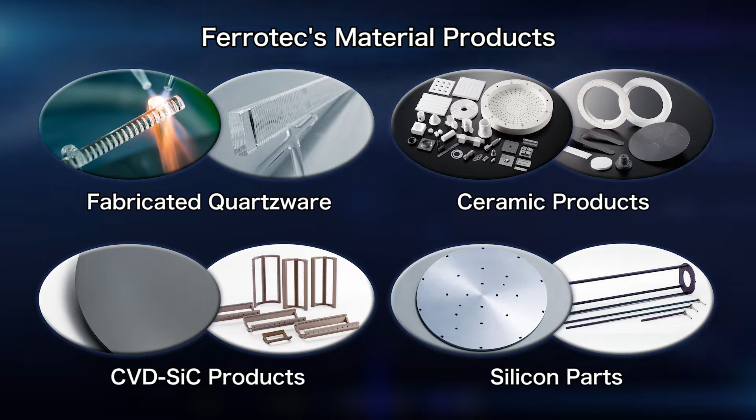Ferrotec is a global company that manufactures and sells high-tech components focusing on the semiconductor market. In the semiconductor equipment-related business segment, we provide material products used in jigs and supplies for semiconductor manufacturing equipment. We also provide vacuum feed-throughs, parts cleaning services, and more.

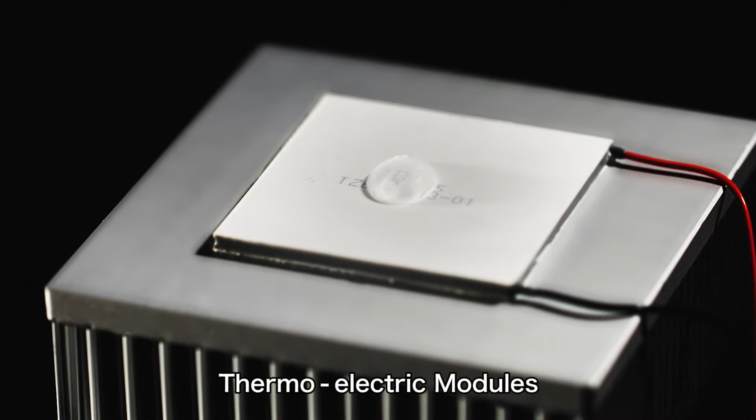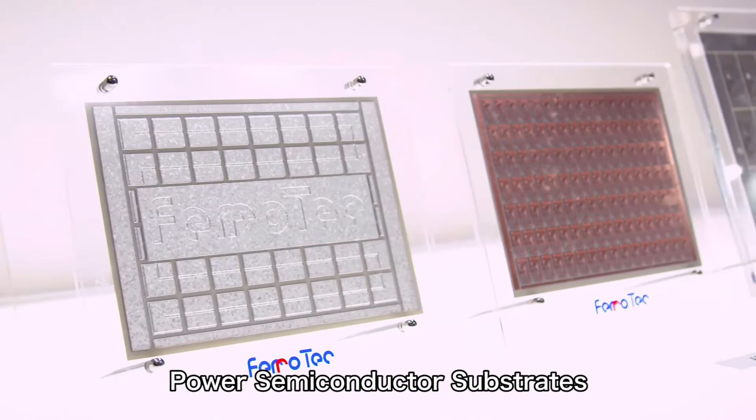Another of our core business segments is the electronic device business segment, where we provide temperature control devices, both thermoelectric modules and power semiconductor substrates, which are seeing tremendous market growth.

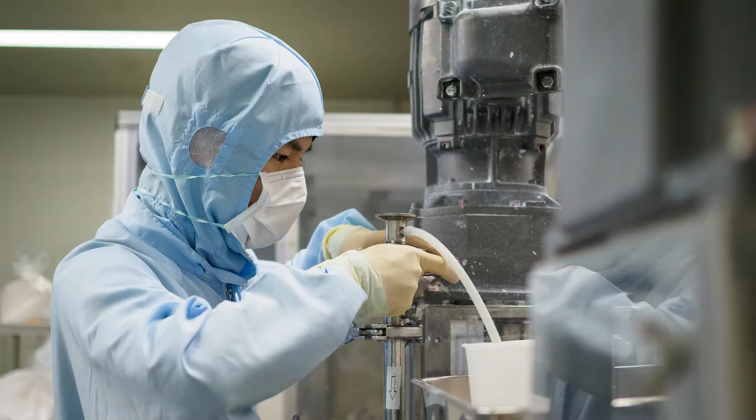Our corporate mission is satisfaction for our customers, earth-friendly and environmentally conscious, and dreams and vitality for our society. We want to earn the trust and satisfaction of our customers, to help solve the world's environmental problems, and to contribute to society through manufacturing. We strive to achieve harmony with society while maintaining a global perspective, supplying products and services that improve the lives of all people.

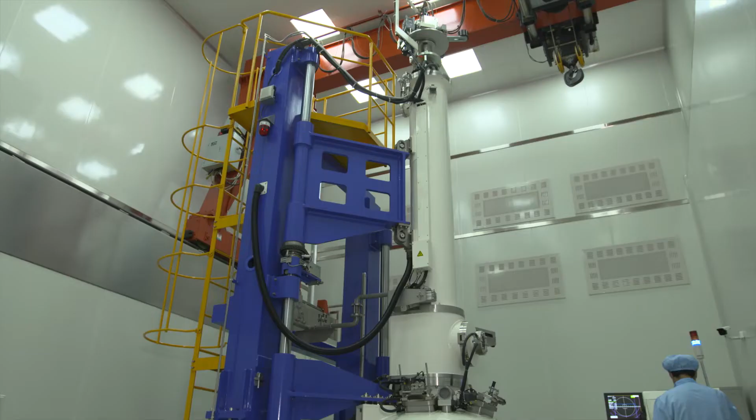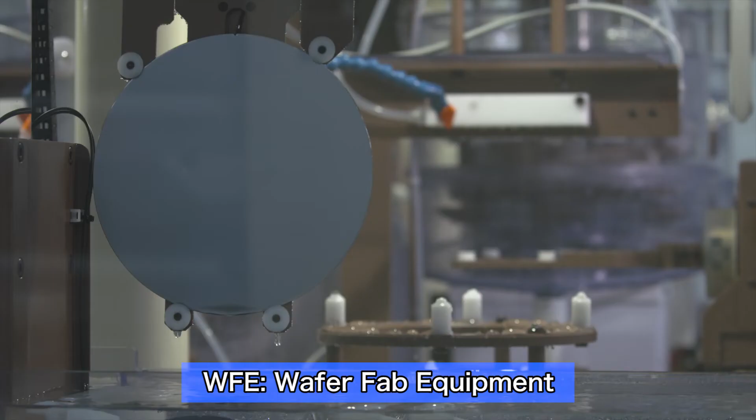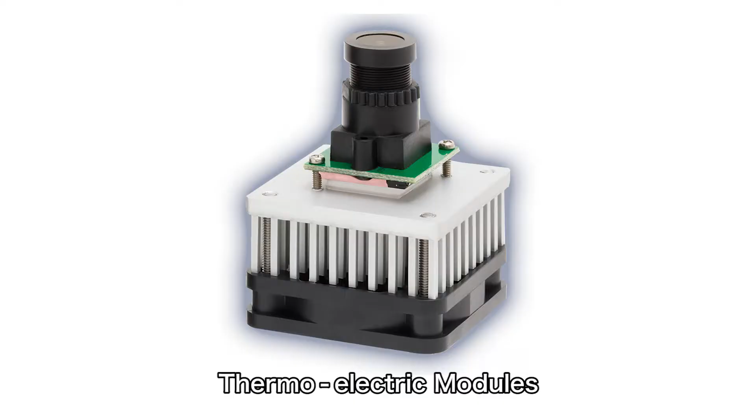Markets closely linked to our business include the WFE market for front-end semiconductor manufacturing equipment and the global semiconductor market. We expect to see sustained medium and long-term growth in all of these markets. In the future, there is also high potential for growth in the markets for electric vehicles and automated vehicles, which also use thermoelectric modules and power semiconductor substrates from our electronic device business segment.

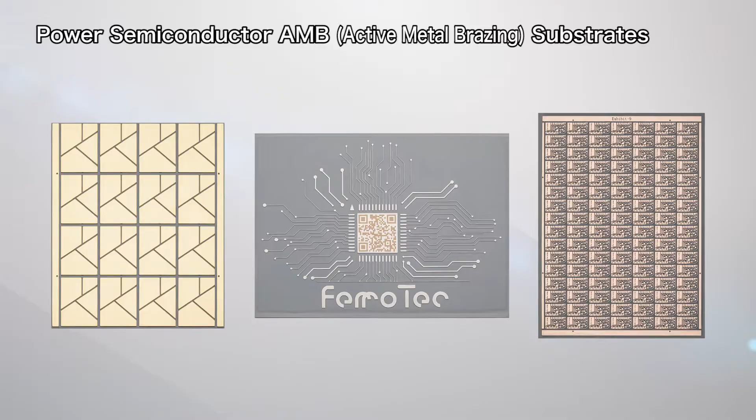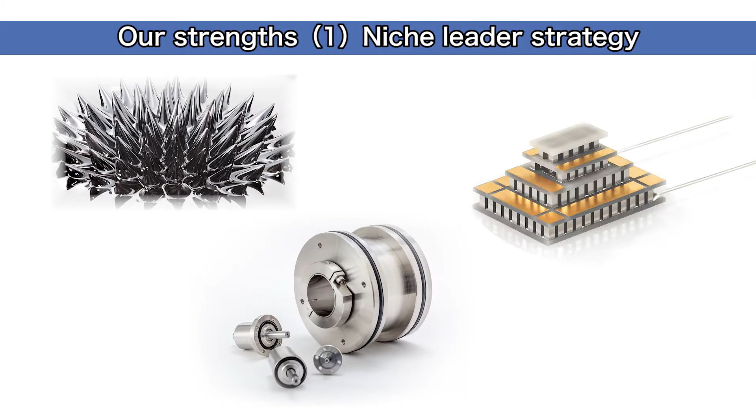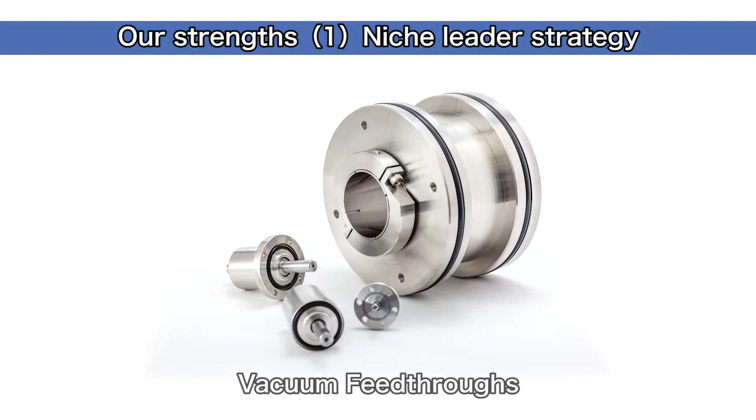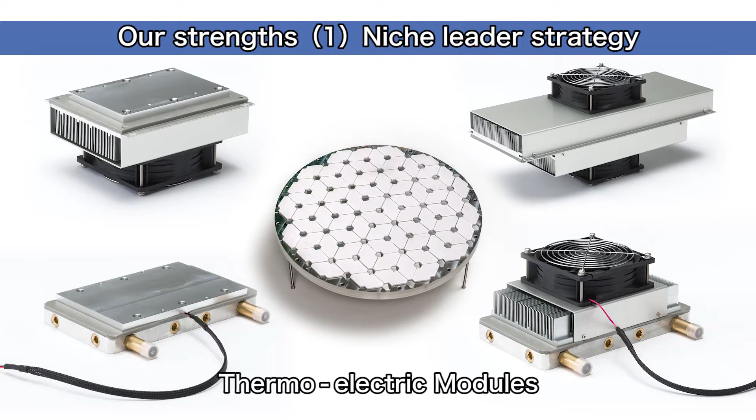For many years, Ferrotec has steadily performed as a company thanks to the core technologies and products that support our niche leader strategy. Our core technology, ferrofluid, a magnetic fluid developed for the NASA space program by our former US parent company, is applied in one of our core products, vacuum feed-throughs. Another core technology, the thermoelectric module, is used as temperature control devices in a wide range of industries. We continue to maintain the top market share for all of these products, and they are the foundation of our business operations.

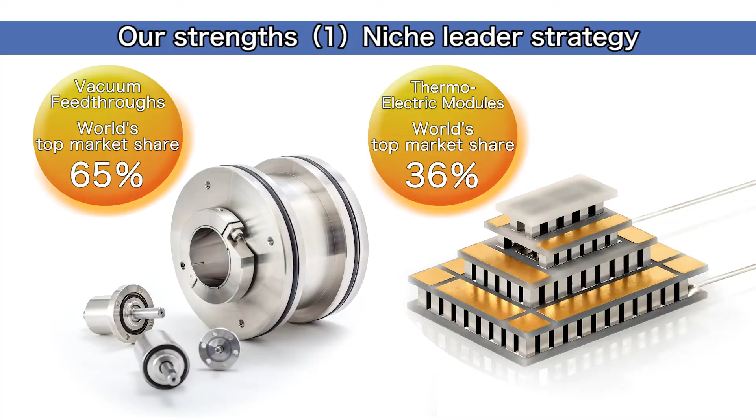Since Ferrotec was established in 1980 as the Japanese subsidiary of a US-based company, we have grown by actively carrying out M&As. In 1992, we were at the forefront of expansion into China, which further contributed to our growth. Through effective M&As related to our core product line of material products used in jigs and supplies for semiconductor manufacturing equipment, we have advanced in our development of materials and production technologies, primarily in Japan, and significantly grown our business, especially in China.

We are a global company whose main clients consist of device manufacturers and semiconductor equipment manufacturers, with some of the most advanced technologies in the world. As part of our global strategy, we have numerous production sites in China, whose market is expected to see the greatest amount of future growth. This is one of our company's strengths. We will also be enhancing our research and development and expanding our production sites in Japan, the US, Europe, and Southeast Asia in order to meet the rising need for semiconductor markets around the world.

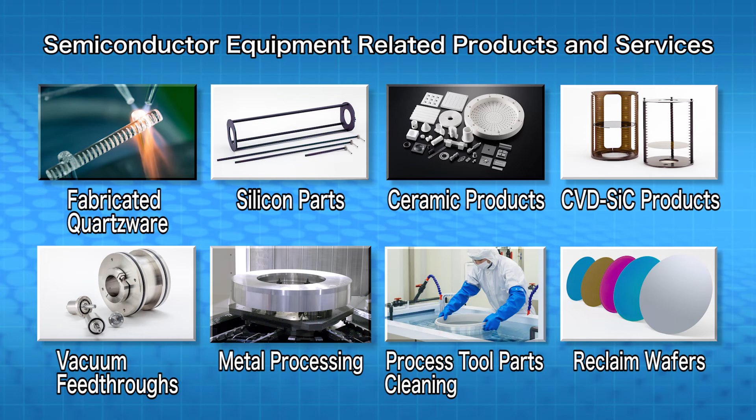The headquarters of Ferrotec Holdings and its principal subsidiary, Ferrotec Material Technologies Corporation, is located in Nihonbashi, Tokyo. Our main production sites are located in the prefectures of Ishikawa, Hyogo, Okayama, Chiba, and Yamagata. Furthermore, given the forecasts for rising demand in Japan, especially in the semiconductor market, we will also create a semiconductor equipment-related production site in Kumamoto Prefecture. In the future, we will continue to leverage our strengths in Japan to enhance our R&D functions and expand our production capacity.